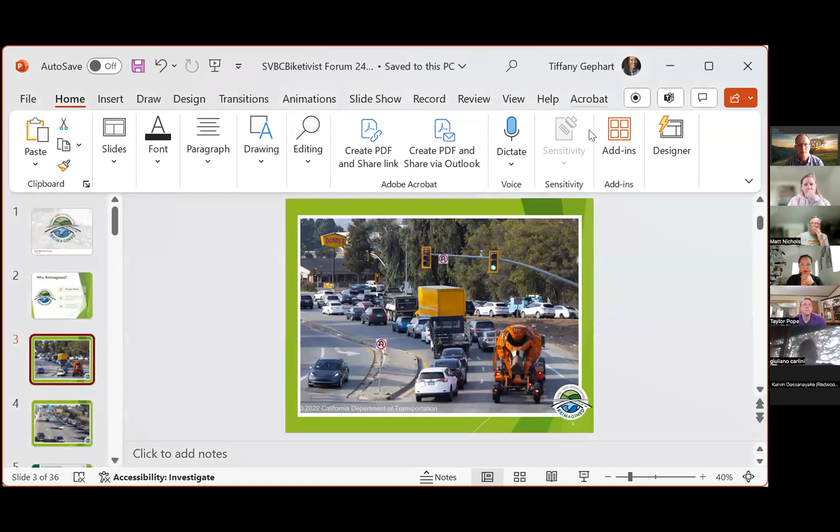So with that, Jimmy, let's jump into project need. Hopefully the slides will advance. Let's be... I apologize, I'm not sure why it's doing that. Let me just - bear with me. If we have to, I have the deck handy so I can put it up too. It's just not wanting to connect. But, you know, all right, we're getting there.

So for those familiar with the 84-101 interchange and having driven through it, this should be a familiar experience. This photo was taken in 2022, so in the middle of the COVID downturn, still a significant amount of congestion, certainly at commute hours of the day. This travel pattern is certainly returning and continuing. The project was envisioned a couple decades ago to address this issue, which has only continued to be persistent that entire time.

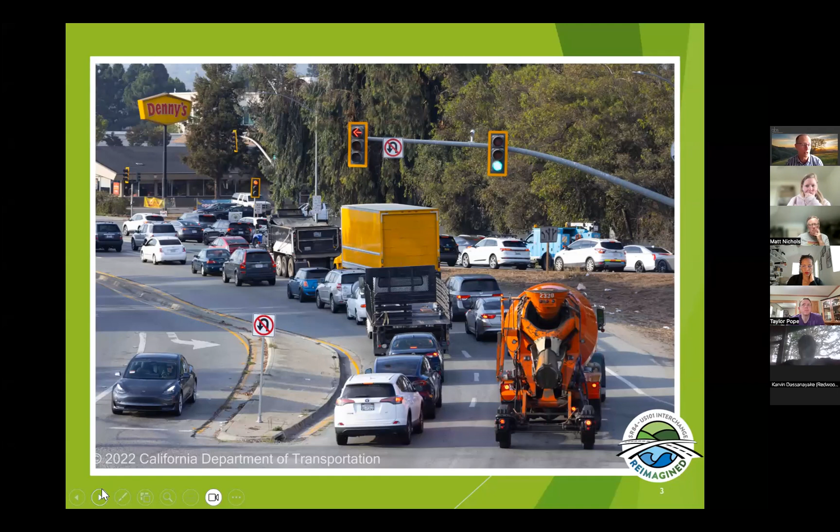So the impact to the freeway shows up on the next slide. On 101, those of you who drive southbound to get into Redwood City through this interchange have probably experienced this backup on 101. That is clearly the result of the interchange performance, but more importantly, it's the impact of the Broadway and 84 interchange or intersection that backs up this traffic here. So clearly there's some congestion issues, but more importantly, some cyclist and pedestrian issues.

But before I jump to that, I want to show you the significance of the backup. This slide shows you what was, at the time the traffic study was done, the length of the backups during the AM and PM peak periods. You can see the AM peak is not quite so big as the PM peak, but it's traffic congestion on all legs of all of the intersections. So there's obviously some challenges operationally with the interchange for vehicular traffic that impacts everybody throughout the day.

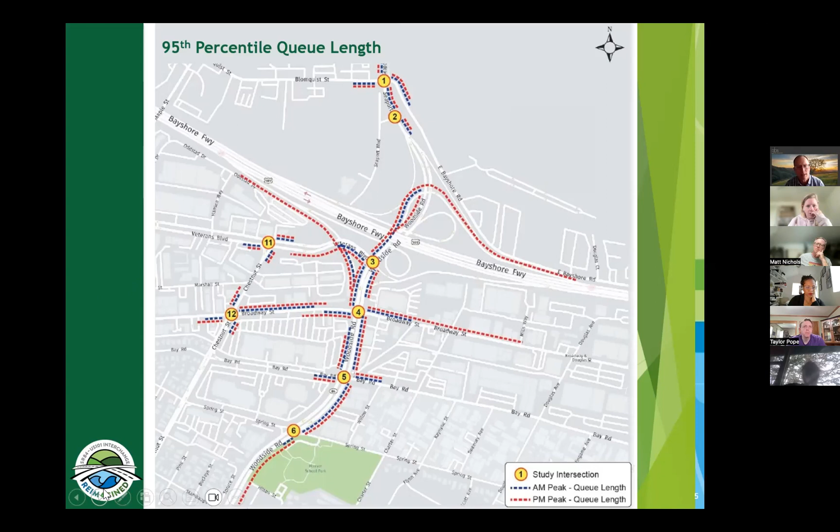And then maybe more significantly to this group, the next slide shows you the cycling experience. There are certainly sidewalks along the city streets, but there are none through the interchange, as you well know, and there are no bicycle facilities whatsoever in the vicinity of the interchange. This next slide shows you more clearly just how much the gap is that exists there. There are class 2 and some class 3 facilities on either side of the interchange, but nothing through the interchange. So we're going to talk about how we're going to close that gap with the project.

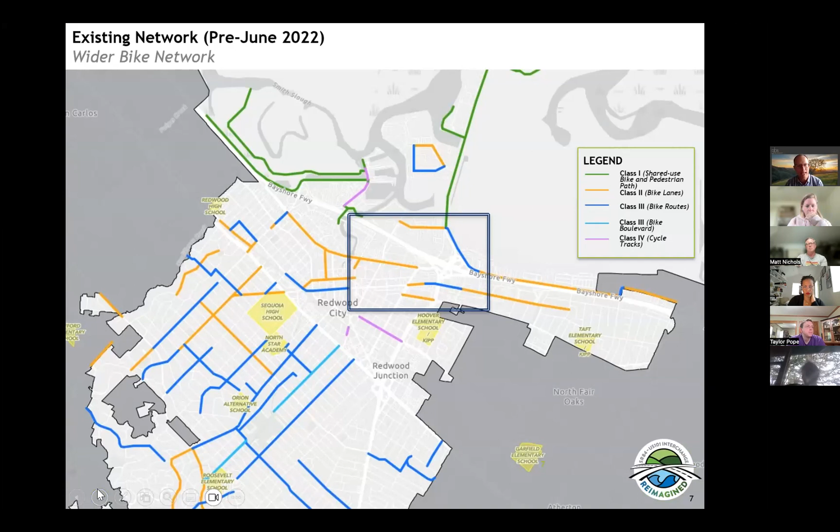So the next slide shows a little bit more detail here on the situation. I would say certainly when this interchange was built, Caltrans was not majoring on bicycles and pedestrians. That has been changing over the last 10-plus years.

And so providing for bicycles and pedestrians in this interchange now becomes an important part of what Caltrans believes they need to do. So that's good.

The problem with this for bicycles and pedestrians is that you can see here, I don't have them labeled on this slide. Now I'm getting into this, I might have hoped to have done a slide. There are 7 slip ramps in this interchange.

A slip ramp, as I'm sure avid cyclists know, is a problem for cyclists and pedestrians because the traffic doesn't have to stop. So to navigate an interchange like this as a cyclist is particularly difficult, if not dangerous. And for pedestrians, it's just a problem because they're not going fast enough to dodge the traffic that never stops. So what we envision here is putting in some facilities to help solve that.

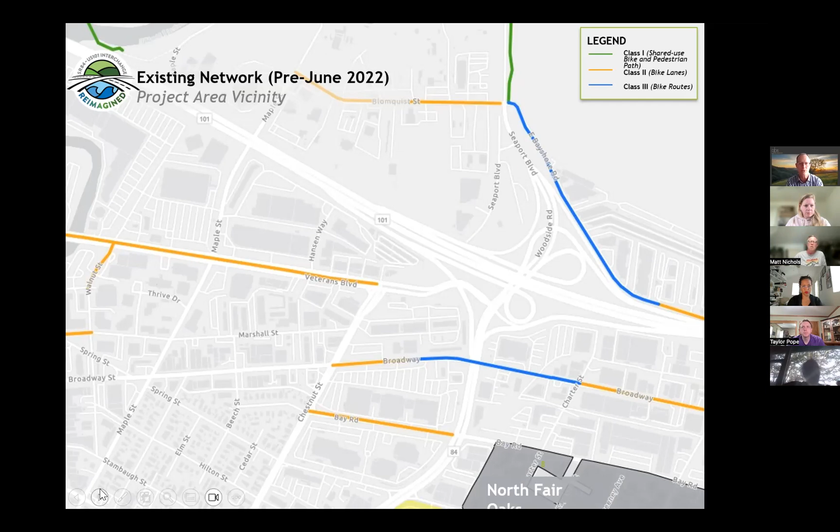Tiffany, the next slide.

I would imagine you're probably all familiar with this, but just to make sure everyone is properly initiated: class 1 facilities are bicycle and pedestrian combined paths separated from traffic lanes, so separated from cars and trucks. Class 2 is a bike lane that's striped into the typical roadway cross section, and not nearly as safe or as protected as a class 1.

Class 3 is just a bike route, so that's the arrow striped in the street, and it's a shared facility with automobile and truck traffic. The class 4 facility is a separated bike lane only, or bike trackway, or cycleway. There are a number of different names, like cycle track, that class 4 bike lanes get labeled by. We have plans to put in 1, 2, a little bit of 3, and some 4. We'll show you the links of those here in a moment.

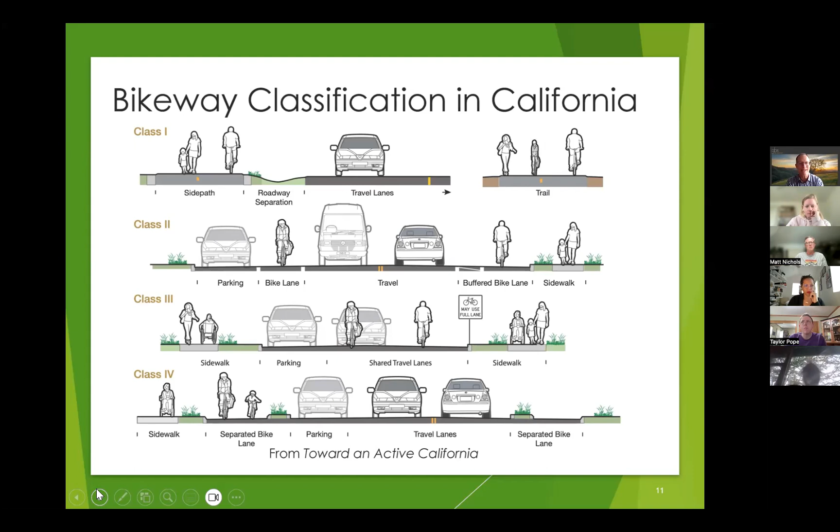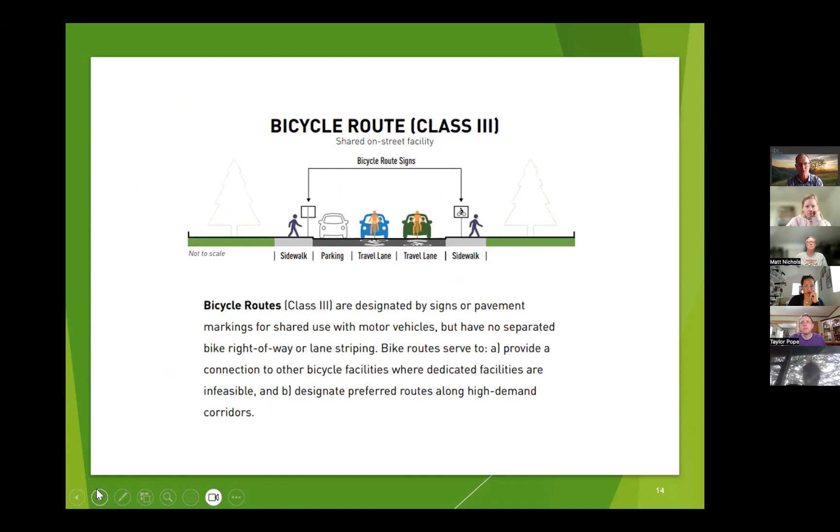All right, next slide. Okay, I'm going to jump through these. If you have questions about the bike path type, we'll come back to these if we need to. These are just further illustrations and descriptions of those types of facilities.

All right, so I'm going to jump in here, and I just realized I didn't pause after my introduction on the need of the facility. So let me pause here before I get into these, because we're going to get into some specifics now. Any questions on the overall project, Matt, in the chat?

I think the questions we'll get to later, which is the connection to the Bay Trail. I think the other one to deal with first is there's a question from Christian about whether congestion equals cars, so that's a backup of cars and trucks. Yes, that is congestion of cars and trucks. I wanted to point out, I'm going to cheat and point out for Christian, that congestion is also a major source of a safety problem and an air quality problem. Yeah, we do have accident patterns associated with the congestion, and obviously idling trucks and cars are not helpful for air pollution.

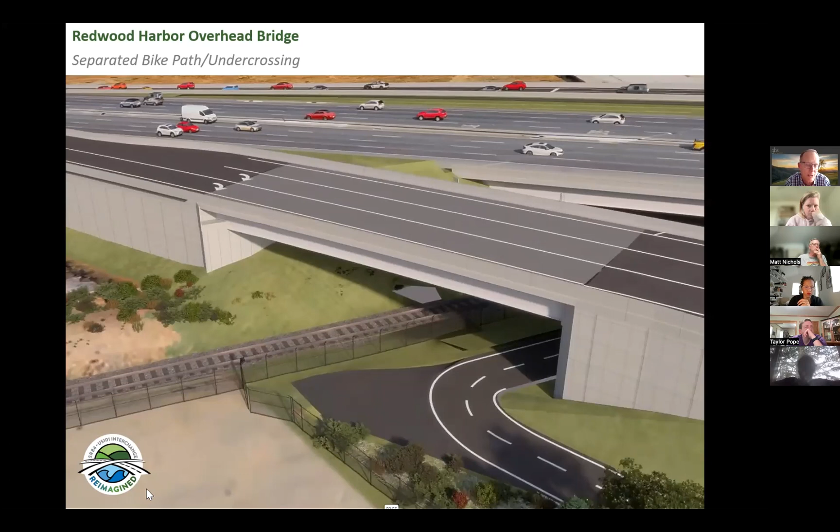The next slide shows you what that looks like on a cross-section basis. You can see the railroad track there in the middle of the area, and then the Class 1 bike facility is to the right, and that parallels the UPRR tracks all the way up to the Blomquist intersection.

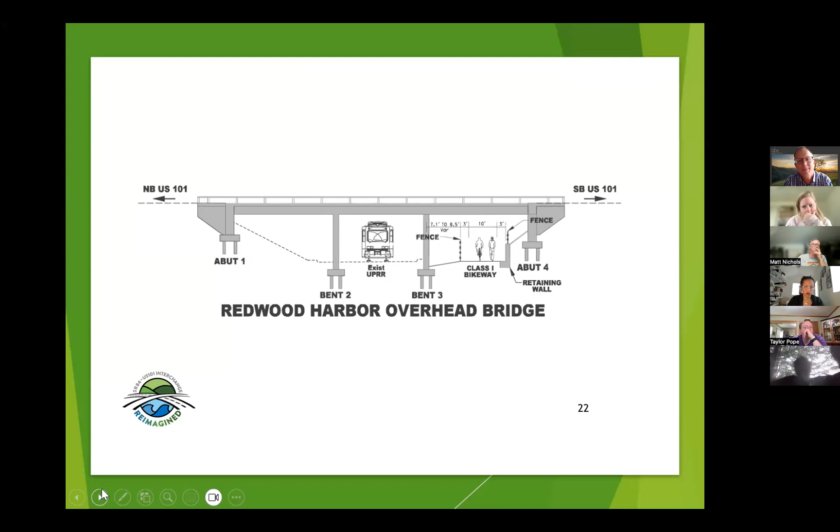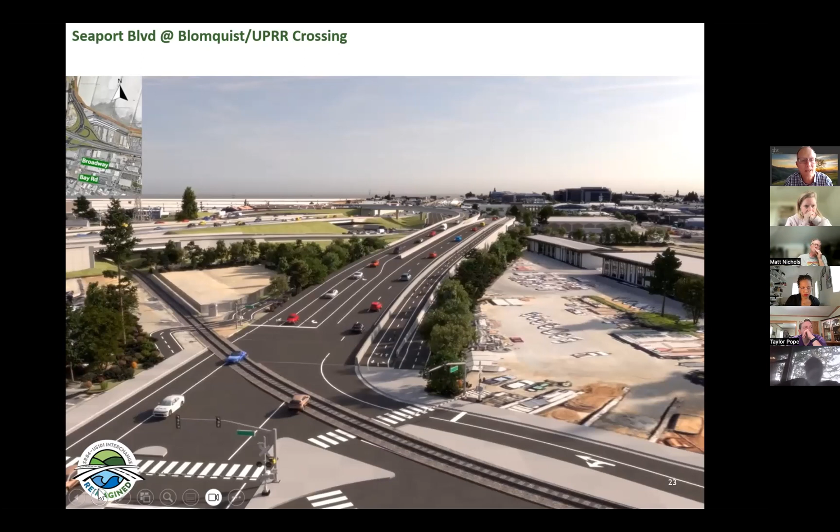I think the next slide is a cross section of that. You can see here the Class 1 next to the Class 4, and then there's a Class 1 on the far left-hand side as well.

All right, and I believe that is my last slide. What's the next slide, Tiffany?

It's just relative links of things that we're building. So one of the things that we have to do is generate some money through grant writing and other things.

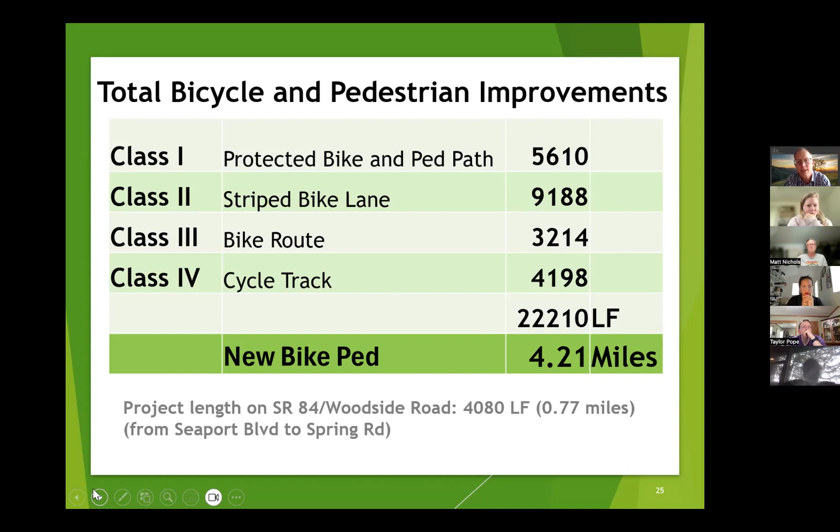One of the things that's important is helping people understand how much bicycle and pedestrian facility we're adding relative to what was there and relative to what we're doing on the street. We're adding just over 4 miles of bike and pedestrian facilities. The next slide shows a comparison of those links—mostly Class 2, but between Class 1 and Class 4 we're almost the same amount. So a little over 4 miles of bicycle and pedestrian facilities, and only about 3/4 of a mile of improvements along 84 itself. This may not impress you much, but it's impressive to people who fund transportation projects, so it's a helpful metric to advocate for funding for bicycle and pedestrian facilities like these.

All right, I think that's the last one. Next slide is a transition slide, I believe. So before we jump into that, let's take some questions, Matt.

There are really three questions I'll put together, but you can also read them. One is about switching between maximizing the number of Class 4 segments instead of Class 2 wherever possible—a reaction to flipping the half blocks where you have the sorting of the bike lane and the turning pocket, and why that is, since it's only half on either side. The other is about lane widths—couldn't they be reduced so you can find room to turn that Class 2 into a Class 4? And then there's a question about that one turn with the crossing—is there anything that could slow down the vehicle, like beacons or anything else, at that right turn?

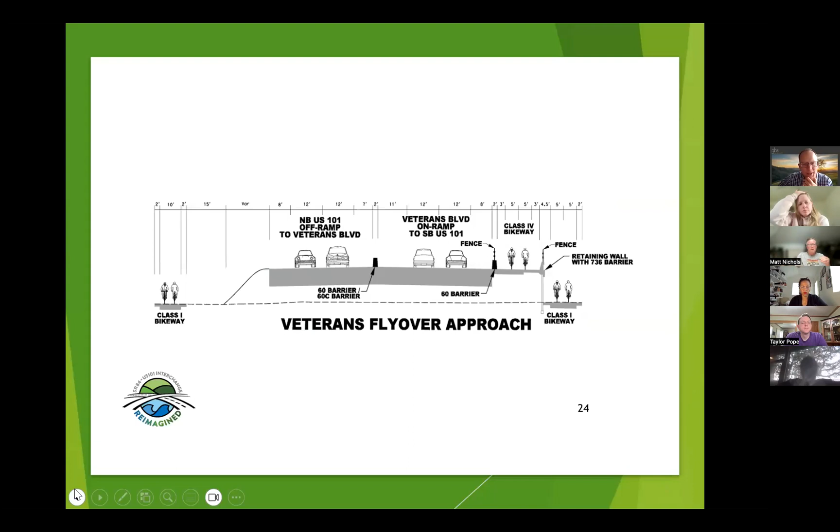So those are okay. Tiffany, let's go back to the slide where we were looking at Bay Street, the first image there. Oh, nope, sorry—jump back to the first one. That one right there. That's perfect. Yeah, all right.

So the first question was, why do we drop the Class 4 in favor of a Class 2 as we get to those right-hand turns in both directions? I wasn't the designer and I've only recently started on the project, so I don't have the full history of the thinking here. But obviously the right-hand turn movements for vehicular traffic have to be provided for. I assume the decision was made given constraints for right-of-way, purchase of property, and cost reasons, that this was the best way to provide for both cyclists and those right-hand turning movements.

It's a good question, specifically on the northbound side, as to why they don't continue that barrier, since there's no traffic getting into that lane—that's something we'll have to get back to you on. On the southbound side, the traffic does have to cross over that lane in order to have that protected right-hand turn, which is why the barrier doesn't continue there. But again, I have to follow up with you on the right-hand turn for the northbound side.

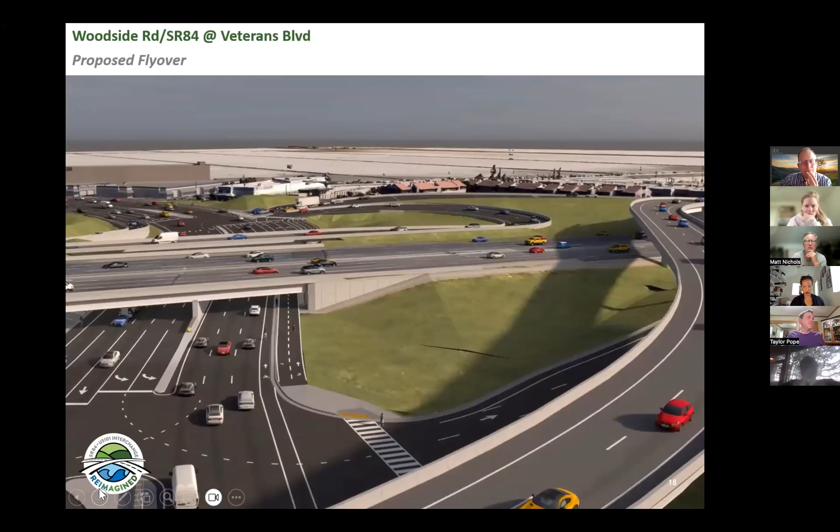Okay, and then you said there was another question about the stopping. Tiffany, advance it to the next one, the Broadway look—not there, the next one—nope, the next one more—there, that one. So that crossing, the visibility, let's talk about that.

The question here specifically was, is there anything to mitigate or manage the speeds and really yielding for the right-turning—those two right-turning vehicle lanes—as people are getting in there and crossing over the Class 2 facility? That would be my assumption there.

That's a good question. I don't know specifically what's happening there. I do know this is not too far from a prior intersection, because there's an intersection immediately on the other side of the freeway, so we're probably not even 100 to 150 yards from the signal. Certainly for a cyclist—I don't know the signal phasing, I'll have to ask about that—if cyclists are given a head start, they would be more visible.

The other way is obviously to lag the traffic that would be ahead of them, but we can investigate how that is envisioned as well.

Fair question. And then I think there was a lane width question, Matt. Yeah, the lane widths are possibly related to speed management, but also really specifically about finding room for a barrier to make a separated Class 4 instead of a Class 2, which was going under.

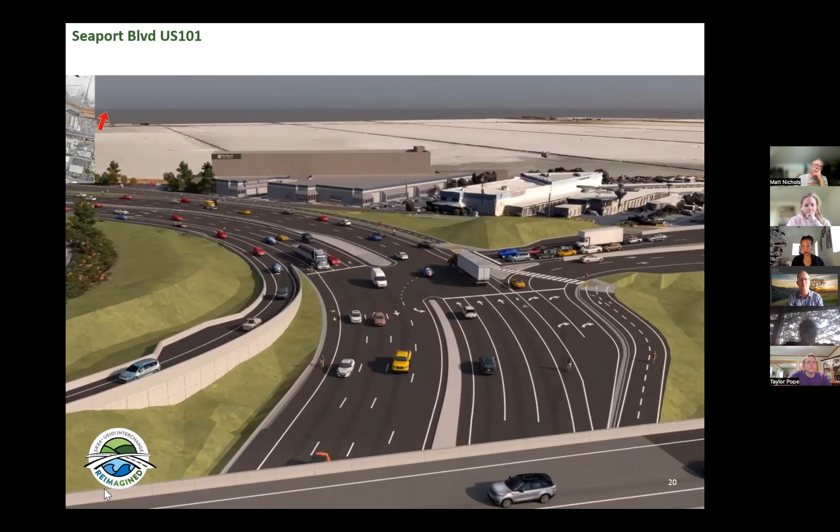And then in the southbound direction, you'll see the 3 through lanes here, plus the start of what is the left-hand turn pocket that becomes 2 lanes underneath the freeway. So when you go back a slide, Tiffany, to the cross section, you'll see the 3 through lanes on the right, and then you'll see that single left-hand turn becomes a double left-hand turn for the on-ramp traffic to southbound 101.

So 3 through lanes in each direction through this stretch of the 84, the combination of Seaport and Woodside Road. The 3 lanes start at Blomquist rather than Seaport, and then carry all the way through the interchange down to Bay.

Okay, so that's just one section. Could you maybe do that same thing for the other aerials, for any lanes that are added or taken away?

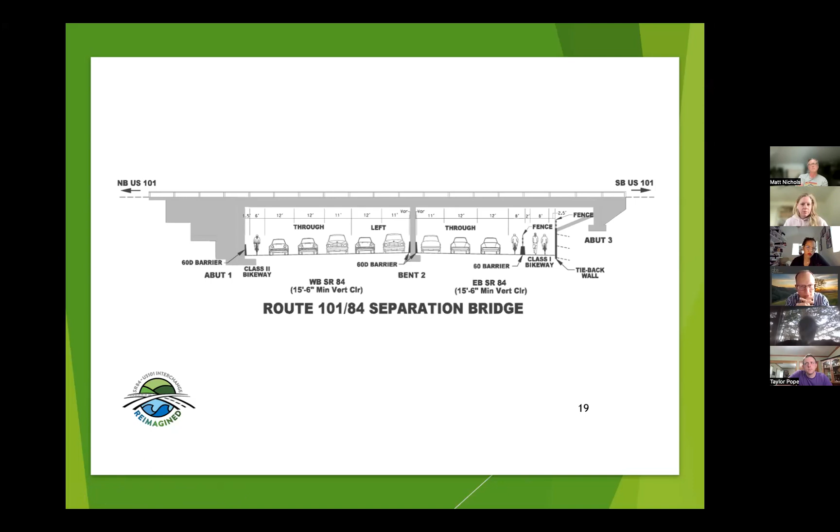Yes, there's no issue there. This cross section here is pretty representative of all of them. So let's go through the set. Let's go back to the start from Bay Road for a moment. That's probably the best thing to do.

At Bay Road, there are 2 through lanes northbound, well 3 - it's a right-hand turn and a through lane, but it's the start of the 3 through lanes there, allowing for the left-hand turn pocket. And in the southbound direction, you see the 3 through lanes coming at us on the left-hand side. I don't know the lane widths here specifically. My assumption is they're at least 11s, and they may be 12s, but I'll have to check on the lane widths.

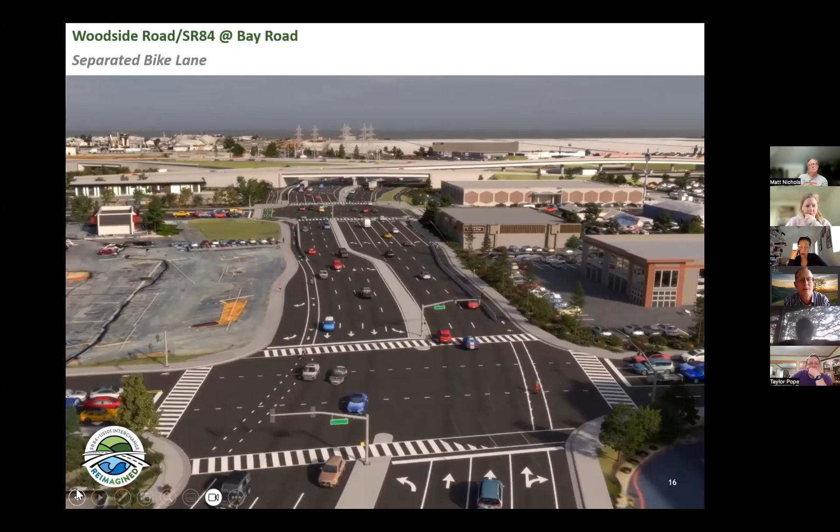And then if you go forward, Tiffany, to the Broadway intersection, you can see the 3 through lanes there, northbound. And then similarly, you can see the dual left-hand turn pockets and the 3 through lanes on the left-hand side. I don't know off the top of my head the widths of those lanes, but we can certainly get them and provide them to you.

Leo, there was a question about this intersection. Sorry to make you take on two things, but Erin's asking about explaining this intersection. It looks like the bike lane will disappear - northbound cyclists will have to cross from the left side and then cross again at Woodside.

Run that question by me again. Yeah, sorry, I can explain it. I just don't understand - right now when you're biking down Broadway, there's a marked lane there on the right side when you're biking. So you're biking, going from Broadway across Woodside, and then you have to wait for the light.

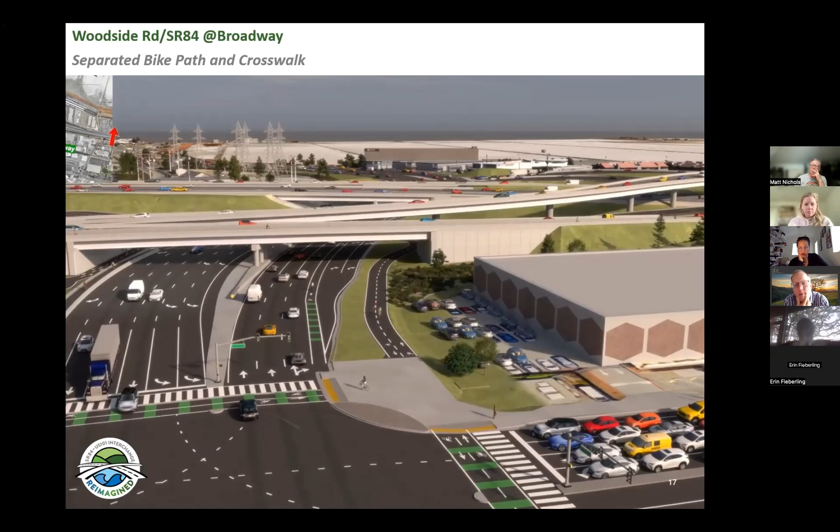Gotcha, okay. So Tiffany, let's go back to the dotted map at the start, back up about 5 slides. There we go, that one. Okay, so on Broadway today, there is a class 2 on what is eastbound, headed eastbound from 84 - that's the yellow dots. And then there's a class 3, that's not really a bike facility, that runs both directions from the mid block down towards Charter.

So the project will actually have a class 2 - I gotta make sure I've got my details right here. We have a class 2 on the westbound approaching from Broadway, approaching Woodside Road, will be a class 2. And then headed away from Broadway on that same stretch, it's also, I believe, going to become a class 2 as well - proposed class 2 going to the other direction.

So that blue line there is not fully correct, because there is a class 2 right now on what is westbound approaching Broadway. So we need to clarify that - that's a holdover from the city's plan.

And then on the left-hand side of 84 Woodside Road, there will be some work developed - some development of the bicycle and pedestrian facilities on that side by the developer. So the developer of that large parcel, which is now a huge hole, includes some bicycle facilities all the way around the block. In addition to what we're doing in Woodside Road, there's plans for that class 2 - I think it's actually going to become a class 1.

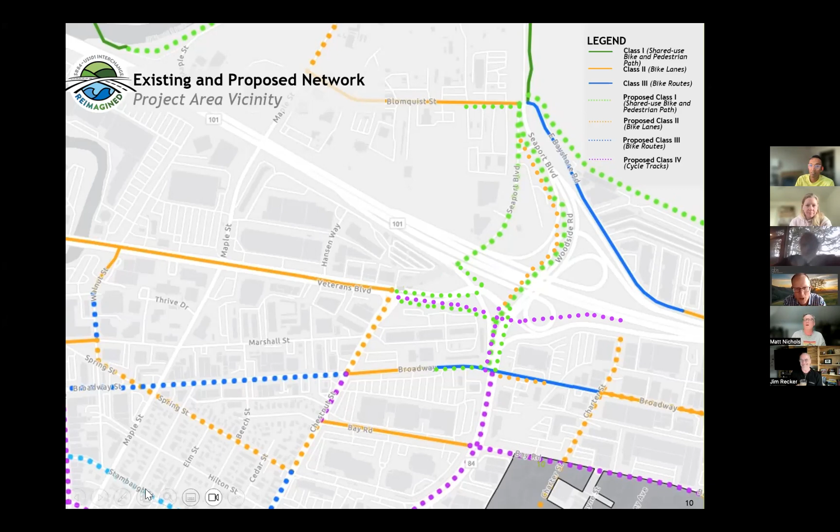Yeah, that's great, Matt, because I need to finish the call but then step away from my computer. So let me jump through the final few slides here to get everybody oriented.

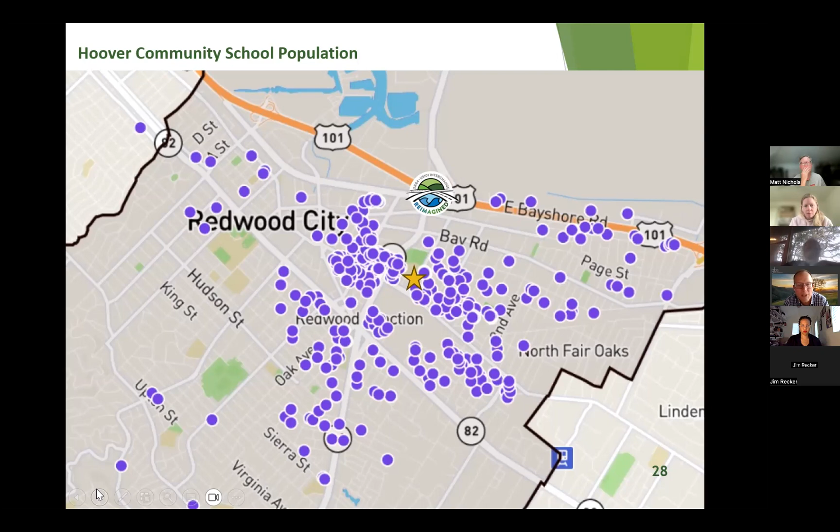One of the things that's important for funding this project is helping the granting agencies understand how we're connecting communities. We have a population - there's a series of trailer parks on the bay side of East Bayshore, of the East Bayshore side of 101, and they have students that ultimately have to make their way over to the downtown side of 101. So providing for their ability to get across the freeway safely is an important part of what we want to facilitate. We can't guarantee they'd use any of the facilities, but we want to make them available for that movement. Moving up and over Woodside Road, and along Broadway or Bay Road, also becomes important to us. So that's one of the features of the project that we hope facilitates that.

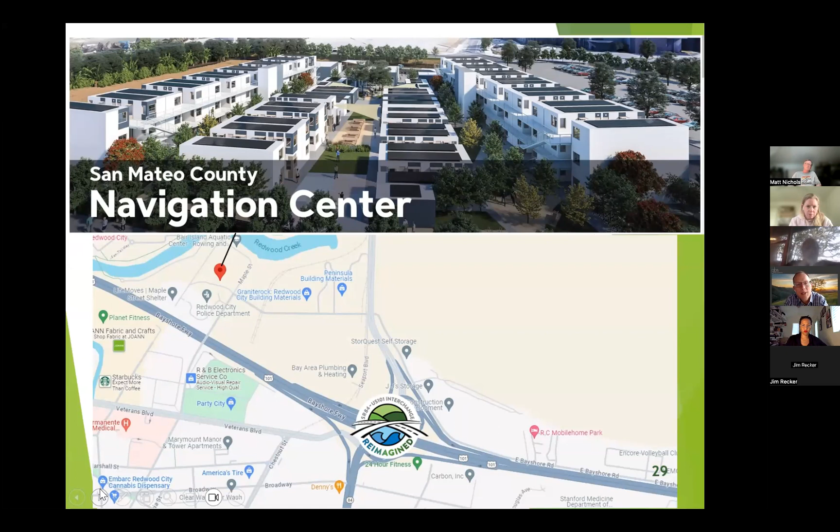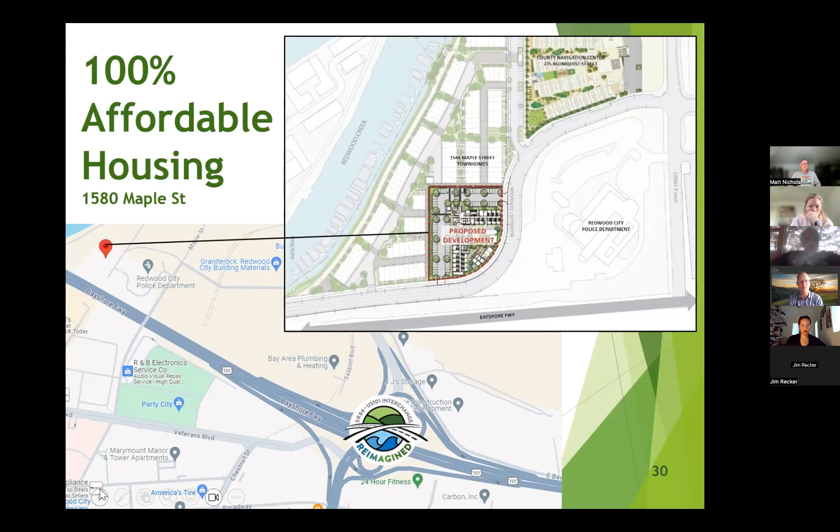In addition, we have the new navigation center on the bay side of 101 along that Maple corridor. So providing bicycle and pedestrian ability to move, whether on Maple - potentially we aren't touching that - but certainly along that Seaport Boulevard facility or on Woodside Road is also important. In that same general area, there's a 100% affordable housing project going in, so there'll be more people in that area, plus one more development taking place that I'll show on the next slide. So there'll be quite a few additional residents over the next couple of years on the bay side of 101, and accommodating them is an important part of the project - that's one of the things funding agencies want to see.

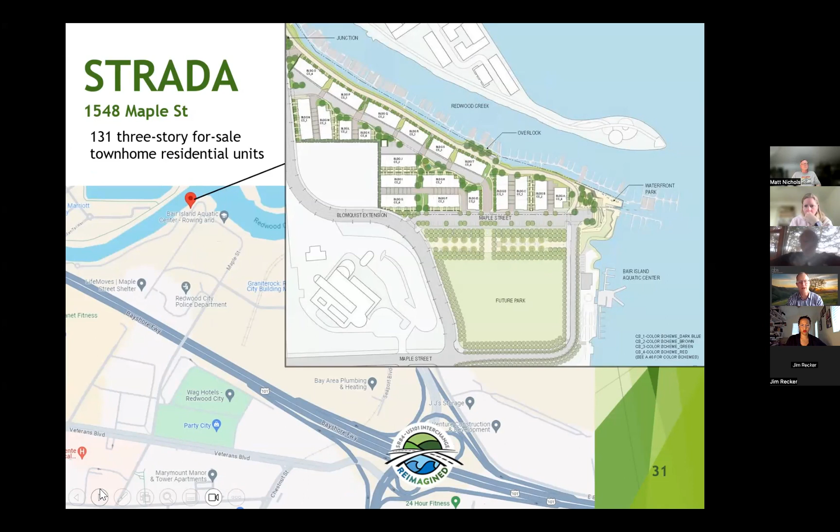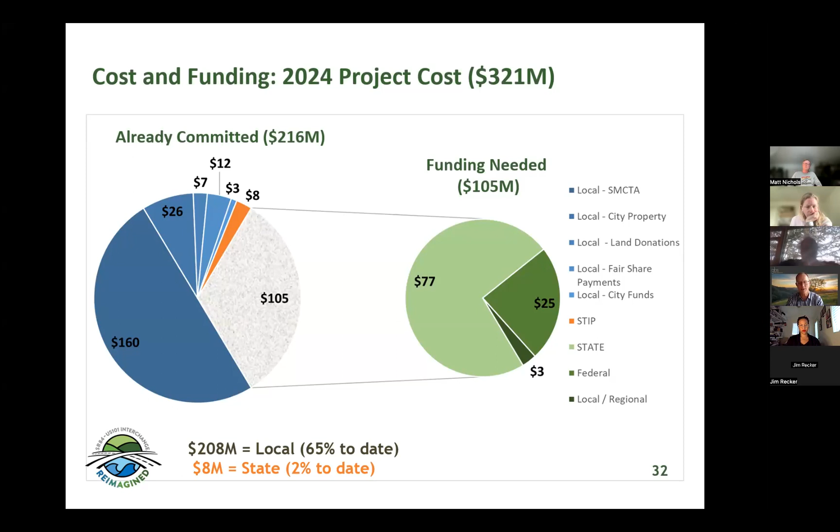So on the next slide, that shows you what is important to us when we start to market the project is that we have a 33% need, and we have relatively little state money and no federal money of significance yet. Part of the story in securing the funding is to help people in the federal and state programs understand that this local contribution is significant, and that there's a local investment in the project.

So we are updating the design. It was put on hold back in the middle of the COVID period. We're reconnecting and redeveloping that. So we do have some finishing to do so we can look at some of the questions and suggestions you're making. I can't promise you 100% on any of them yet, but we can certainly get back to you.

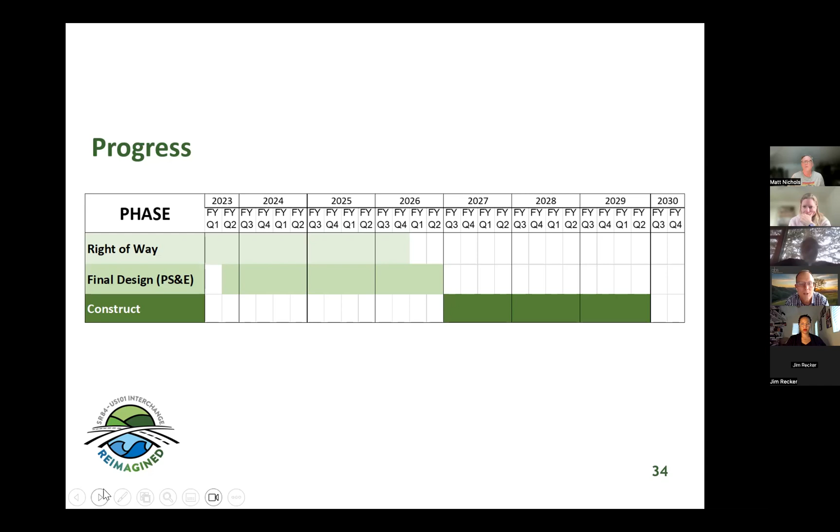We anticipate lining up all the funding, getting the plans done, and starting construction in 2027. I'd like to beat that, but at the moment we think this is the most likely timeline given the current climate that we're in on all of these items. And that's the last slide that we have in the deck.